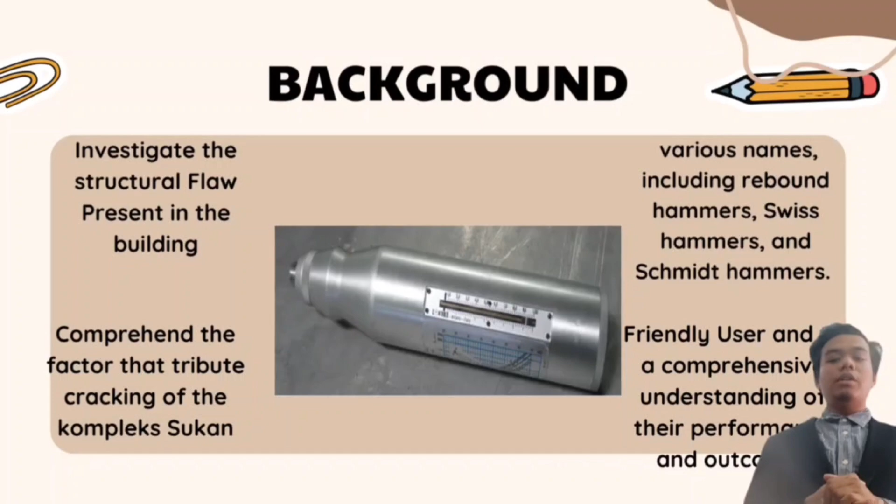Rainfall, temperature, earthquakes, wind speed, and so on are some of the major natural sources of structural failure. These natural variables may come into play gradually or unexpectedly, and structures may be built to accommodate these factors. An earthquake is caused by a sudden release of energy in the earth's crust, which causes seismic waves. Earthquakes cause shaking and, in some cases, displacement of the ground at the earth's surface. If seismic protections are not followed during design and construction,

there are a few reasons why the precast concrete at the site cracked. Poor maintenance is the first factor. It is necessary to perform regular maintenance on a structure following a specific duration after its initial construction has been completed. Certain structures may require an early assessment of their deterioration issues, whereas others can exhibit long-term durability based on the quality of their design and construction.

In addition, the regular application of external paint on the building serves as a means of safeguarding the structure from potential damage caused by moisture and various chemical agents. The application of waterproofing and protective coating on reinforcement steel or concrete serves as a second protective measure. The effectiveness of this measure is contingent upon the quality of the concrete.

Next, poor construction phase. There is a wide range of construction techniques that cause concrete to crack. Inadequate construction methods are typically brought on by ignorance, carelessness, avarice, or irresponsibility. Primary reasons for inadequate construction methods are: first, choosing the wrong material; second, selection of inexpensive, low-quality material; third, inadequate and incorrect mixing of mortar, concrete, and other mixed components; fourth, control issues at many stages of the manufacturing of concrete, including batching, mixing, transportation, placing, finishing, and curing.

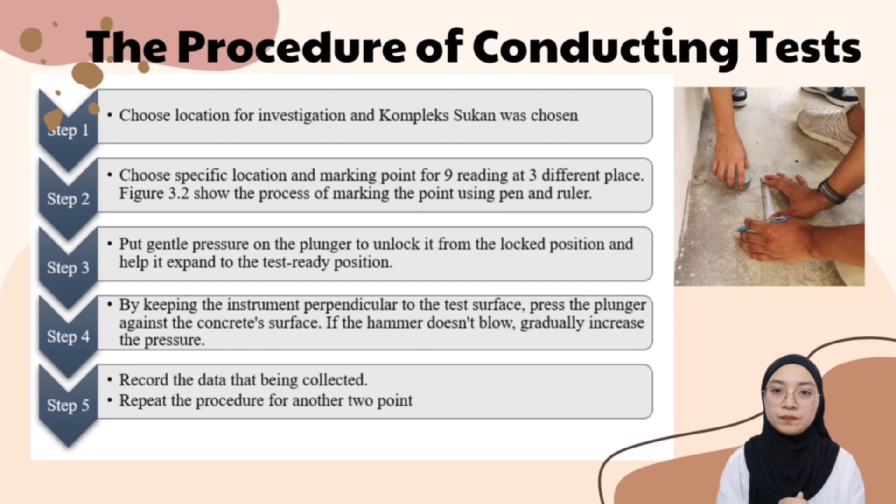Next, put gentle pressure on the plunger to unlock it from the lock position and help it expand to the test ready position. By keeping the instrument perpendicular to the test surface, press the plunger against the concrete surface. If the hammer doesn't blow, gradually increase the pressure. Record the data that is being collected. Repeat the procedure for another 2 points.

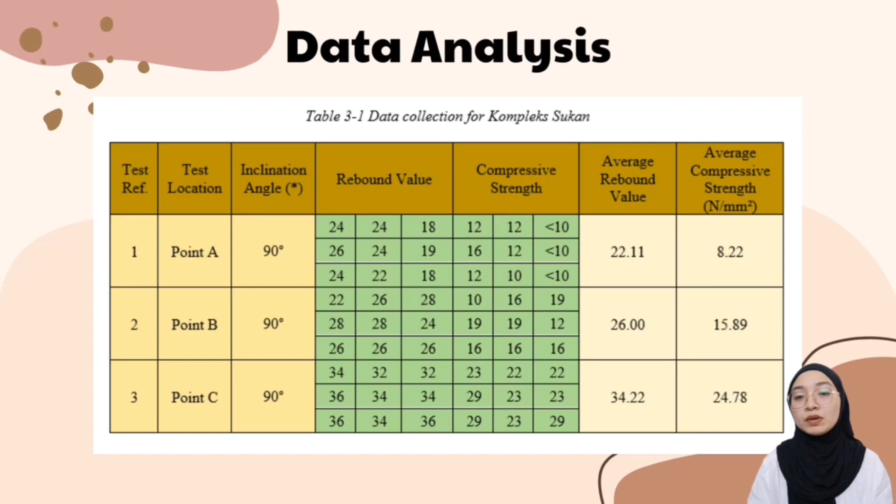I will present the finding in our case study. The sport complex of UiTM Sri Iskandar architectural design findings emphasize the value of adhering to established guidelines and design codes. So the first point on design aspect is insufficient reinforcement. Insufficient rebars may make the slab prone to cracking, especially when subjected to strong loads or temperature changes.

Next is inadequate joint placement. The slab may break in unexpected places if joints are not placed correctly or if their spacing is too broad. Besides that, insufficient subgrade preparation. The slab may move differently and break if the subgrade is not correctly prepared or compacted, causing uneven settlement.

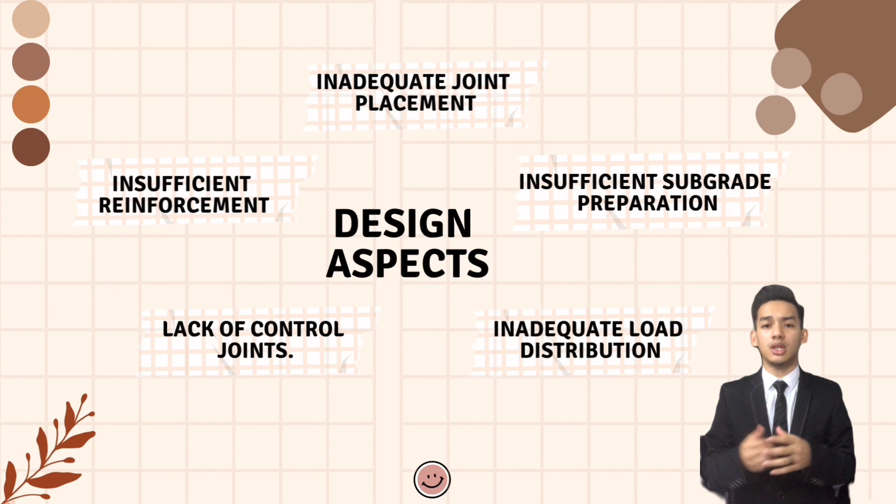Other than that is inadequate load distribution. This might happen if heavy machinery or point loads are not adequately taken into consideration in the design. Then, lack of control joints. The slab may randomly break in unfavorable places if control joints are not sufficiently present or if their spacing is excessively broad. For construction aspect, the study additionally explores how a sport complex is built, concentrating on the procedures, techniques, and issues to think about when doing it physically.

Construction aspect must follow conformity to the standard of work practice and specification. The first point on the construction aspect is improper concrete mix design. Shrinkage and cracking or less resilience to environmental pressures might result from a poorly formulated mix. Next is insufficient curing. A weak slab prone to cracking can be produced by insufficient or incorrect curing practice, such as inadequate moisture retention or early removal of formwork or curing materials.

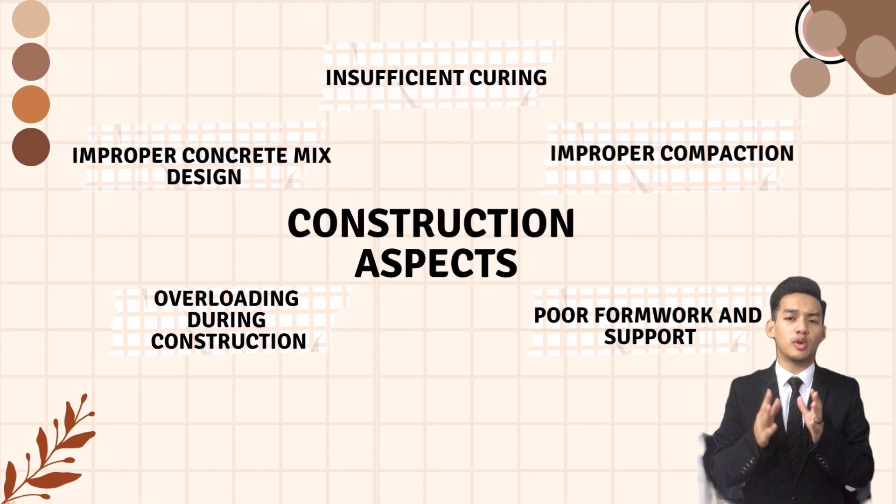Besides that, improper compaction. Concrete not properly compacted during placing may develop voids, honeycomb, poor consolidation. Other than that is overloading during construction. During construction, high loads on the slab, such as the storage of bulky construction supplies or heavy machinery, can lead to overstressing and cracking. Then poor formwork and support. The formwork might bend under the weight of the concrete if it is not sufficiently supported or braced, leading to an uneven or weak slab that is more likely to break.

In addition to design and construction, the study also examined a sport complex environmental aspect. The first point on the environmental aspect is temperature changes. The slab expands when the temperature increases and contracts as the temperature falls. Next, moisture variations. The amount of soil beneath the slab might alter depending on the moisture content. When the earth is moist, it enlarges and contracts as it dries out.

Besides that, chemical exposure. Over time, concrete can degrade as a result of exposure to certain chemicals, such as de-icing salts, oil, or acidic substances. These substances may penetrate the slab surface, weakening and increasing the likelihood of cracking. Other than that is poor drainage. The slab may settle unevenly and break as a result of the increased moisture content weakening the subgrade or promoting erosion. Then, vegetation growth. As neighboring trees or plants swell, their roots may put a strain on the slab. If the roots pierce the concrete, this pressure may cause the slab to move or break.

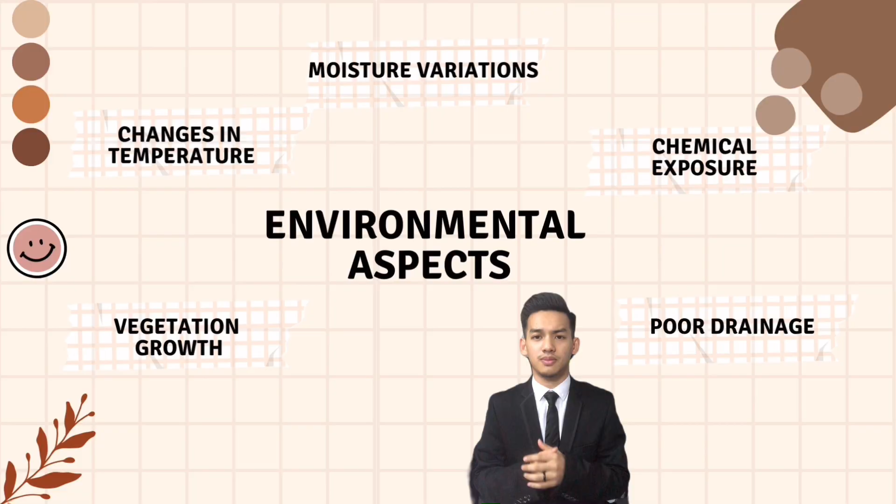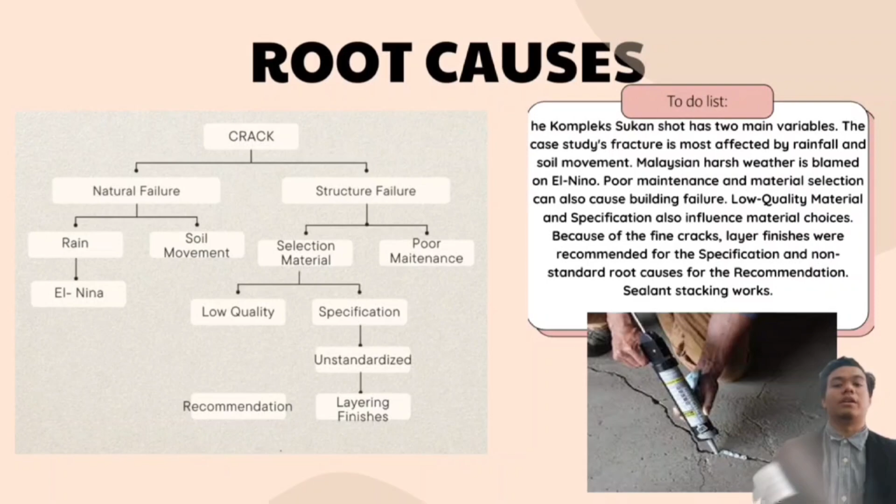In a case study of Kompleks Sukan in UiTM Seri Iskandar, forensic engineering was used to investigate a structural flaw. The study revealed design aspect and construction-related factors that contribute to floor slab crack. It emphasized the importance of adhering to guidelines, codes, and regulations to ensure structural integrity. In conclusion, forensic engineering provides valuable insight into failure and accident. By applying engineering principles, conducting thorough investigation, and collaborating with experts, forensic engineers contribute to public safety and prevent future incidents. The case study highlights the significance of design and construction consideration in engineering projects.

Crack failure in structural components poses serious concern for reliability and safety. To address this issue and reduce risk, several recommendations can be implemented. Firstly, conducting comprehensive inspection and assessment of susceptible components is essential. This includes examining material, manufacturing process, and operating conditions to identify factors contributing to crack. Performing a detailed root cause analysis helps identify underlying factors responsible for crack failure. This involves examining material properties, design flaw, manufacturing defect, and operational stress to implement corrective action.

Material selection should prioritize enhanced fracture resistance, including non-destructive testing to help identify potential defects or inconsistencies. Advanced engineering principles, stress analysis, help to identify high stress area. Advanced manufacturing techniques such as precision finishing and controlled heat treatment enhance structural integrity. Applying stress mitigation techniques like surface treatment and stress relieving process reduces crack initiation. Stress redistribution through design modification disperses load concentration.

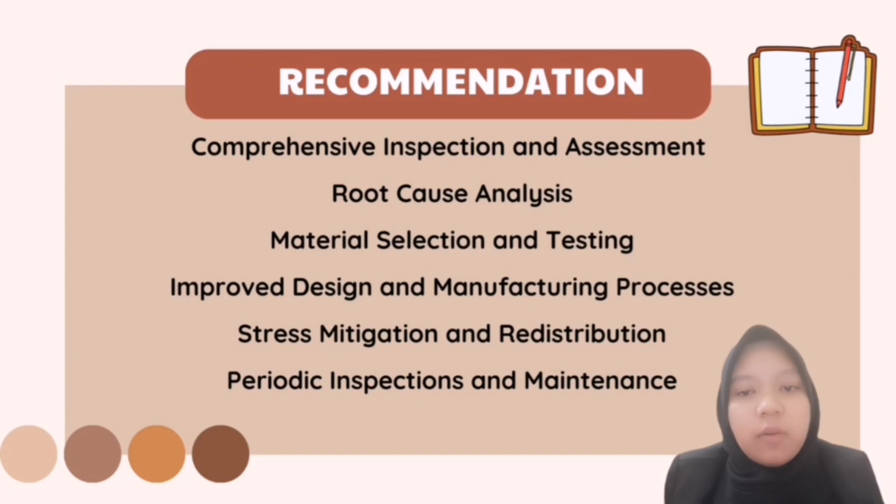Regular inspection, including visual inspection and structural analysis, helps detect crack at early stage. A comprehensive maintenance plan with repair or replacement strategies ensures long-term system integrity. Preventive measures and technological remediation procedures are crucial in mitigating the risk associated with crack failure. By following these recommendations, organizations can reduce the occurrence of crack failure, enhance product reliability, and prioritize user safety.